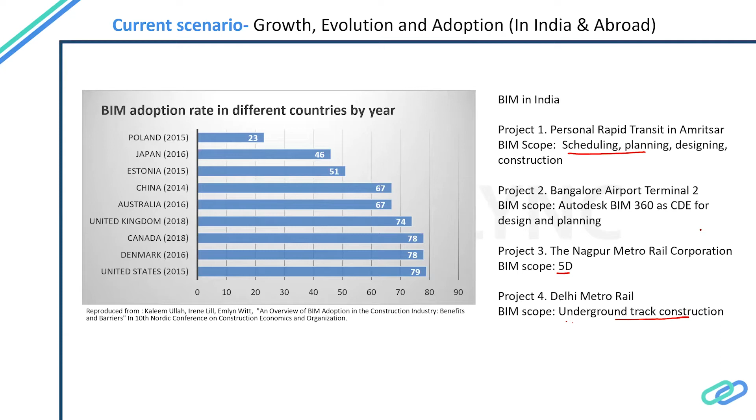For design, we have AI-based tools for form finding and for modeling organic shapes. Next is 4D sequencing, the time parameter. 5D is cost for estimation. 6D is LCA and sustainability. Digital document and management comes under the documentation scope. Design coordination and issue resolution is clash coordination.

During the construction phase - this also applies to the design phase - we virtually construct the building and resolve all clashes. While on site, we'll have no surprises to face. These are a few tasks associated with virtual design and construction: trade modeling and shop drawings, model-based coordination to resolve clashes, virtual mock-up to build systems and assemblies as they will be built on site, and to identify value and eliminate waste.

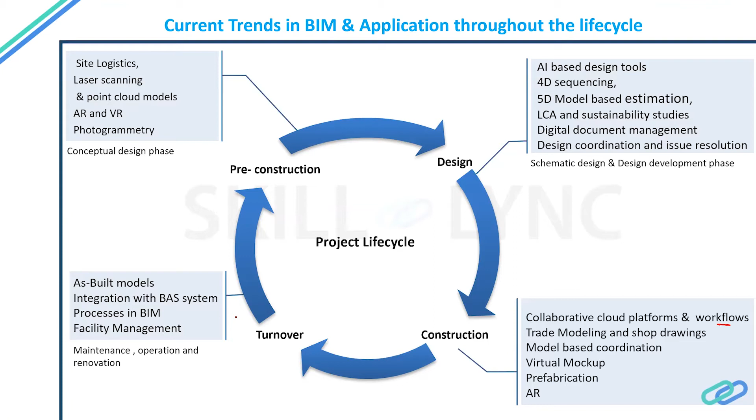As we saw earlier, the scope of BIM is not restricted to a building. It can be for different scopes, from macro to micro, on different components of the built environment. It can be for architecture and building design, civil and structural engineering, energy and utilities, highway and road engineering, landscape and land surveying, offshore and marine architecture, rail and metro, and tunneling.

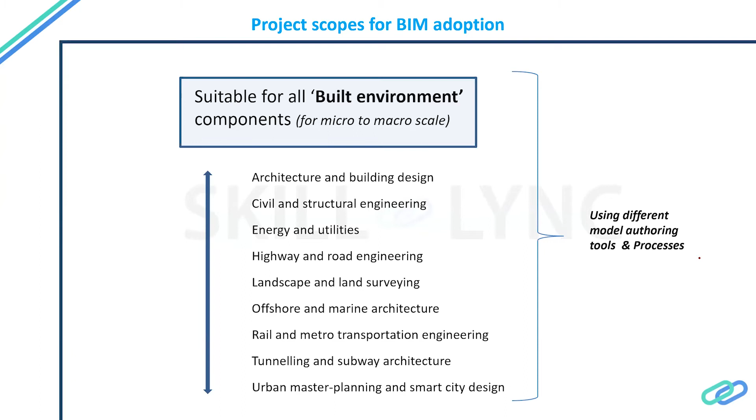We saw a few Indian examples for this as well. Every project scope can be authored using different tools and processes. One model authoring software need not necessarily - or cannot necessarily - take care of all the components listed. These are a few of the software widely used; it is not holistic.

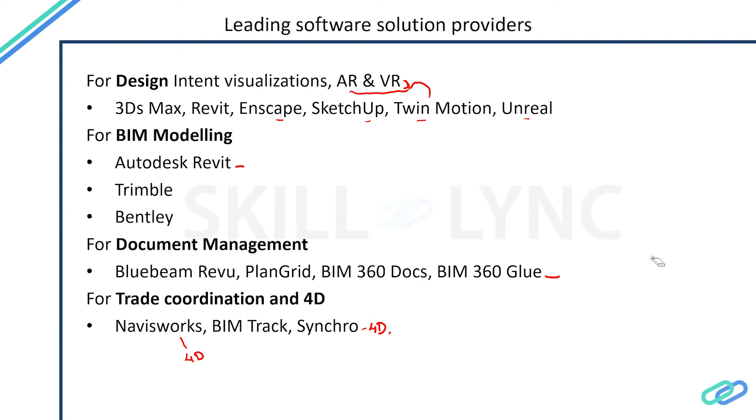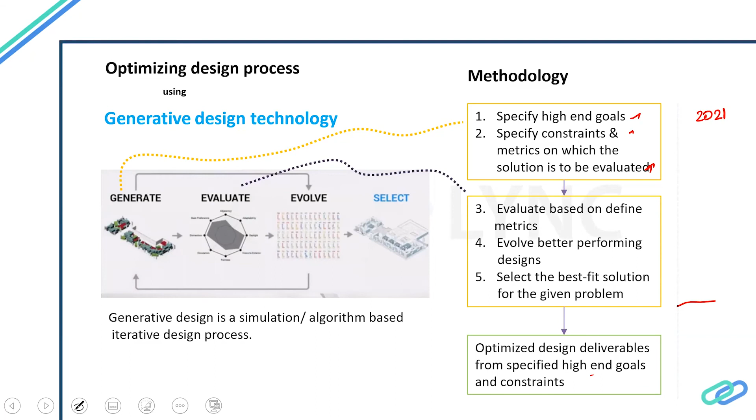So in the end, what we receive is an optimized design deliverable from the high-end goals and constraints we specify. So these are a few software platforms and techniques that aid the concept we saw before.

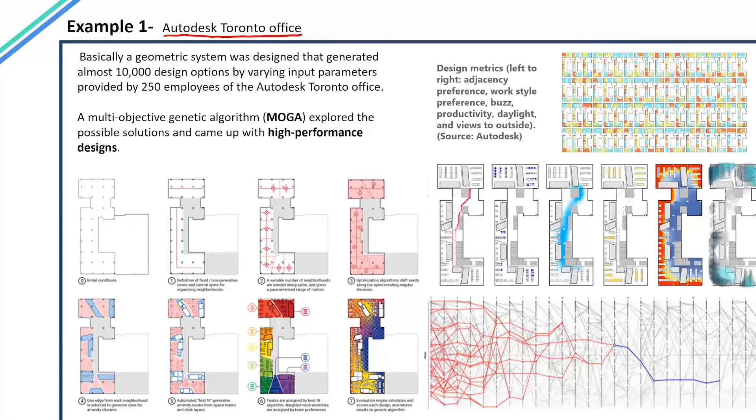This is the case study we are going to look at. This technique was employed at the Autodesk Toronto office on a particular scope, that is interior layout optimization using the technique called multi-objective genetic algorithms. They used these algorithms to generate high performance designs based on the parameters that were listed.

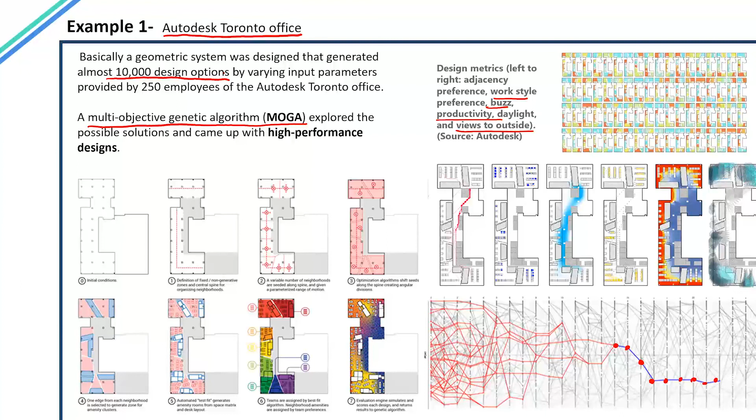A few of the parameters that they used to define the problem were work style preference, productivity, daylight, and views to outside. We see a graph here which travels from one point to another. Every point which intersects with a vertical line is a solution. So they had around 10,000 design options by varying different input parameters to arrive at one particular design for this project. These are a few of their design goals that they used to evaluate the design options that were delivered.

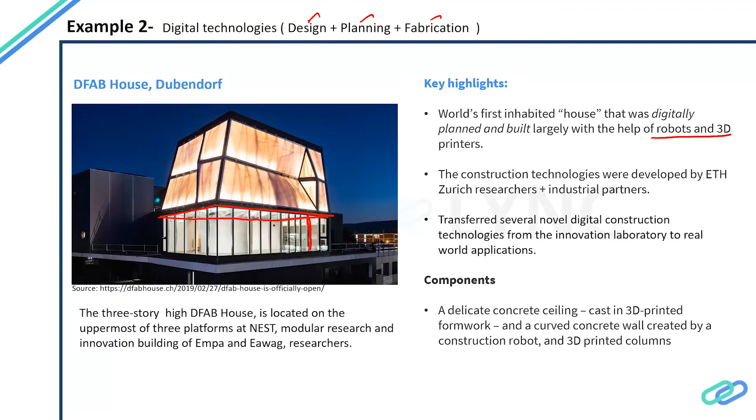So to get into this domain, basically we need to have the enthusiasm to explore different software platforms and tools for the AEC industry, and understand what value it can give us and how. A basic understanding of the workflow and process is also important. This is what can distinguish or be a standout point from the rest of others - a good grasp on how to utilize those tools and techniques to deliver the expected value, and then skills to collaborate, communicate, and coordinate. These are the few things that are very important to get into this domain.